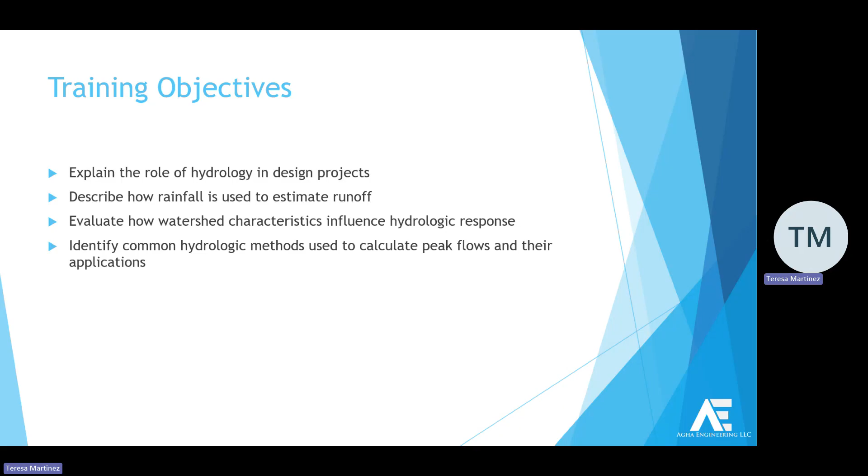So session one. Before we go through everything, since we all have some background in hydrology, we're gonna go through all the terms really quick, so that way if you know it, it's good, and if it's really old, it's good to refresh all the terms. So that's about session one. Okay, so let's go.

Okay, so the role of hydrology, as we mentioned before, hydrology is the input for the subsequent analysis or design work. The goal of hydrology is to obtain or determine the runoff based on your precipitation. We will use that as input to size our structure, the culvert, the ditch system, because everything's designed to provide the adequate capacity to pass a certain amount of flow.

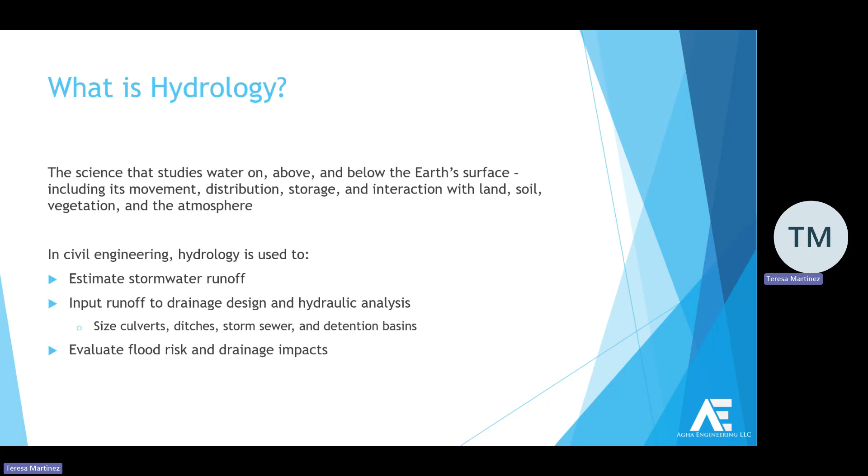So that's the goal. And then at the end, after everything's completed, the analysis, the design work, then we'll have to also evaluate if there's any impact to the existing condition, or if there's any impact to adjacent properties. So that could also lead to any legal issues as well.

So Teresa, you want to cover this one? Yeah, so we started it like from the basics. This is like going back to almost elementary school, but it is the essence of hydrology. Because when we think about it, we're thinking about the precipitation that's falling, but not all precipitation becomes runoff. So in our models, we account for total precipitation that falls, but we also account for losses. Water is lost through evaporation, infiltration, percolation, and those effects reduce the amount of runoff that we account for in our designs.

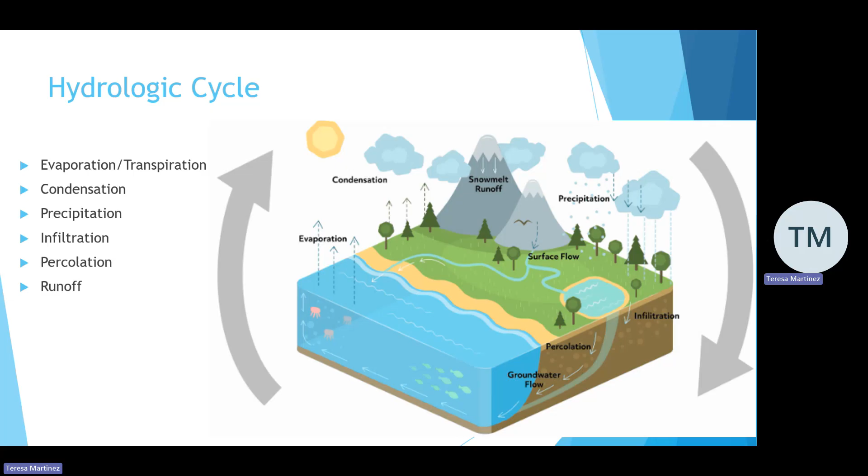So then when we translate hydrology into roadway design, when we think about roadway projects, what we're doing is either improving them by widening or adding more asphalt. And whenever we do those things, we're increasing the amount of impervious cover.

Meaning that now more rain that falls, or less of the rain that falls, will infiltrate. So you can see in the picture there's more water that's not going to infiltrate, and we have to figure out a way to quantify that volume of water to be able to design our systems.

The key goals in our hydrologic analysis are to be able to identify an optimal outfall. When we think about a drainage system, it's typically at cross culvert locations, maybe into a major stream. But when we think of, like you guys mentioned, a crossing analysis, typically you would set your outlet as that crossing location where you have a larger watershed coming in through there. So it's like two different perspectives.

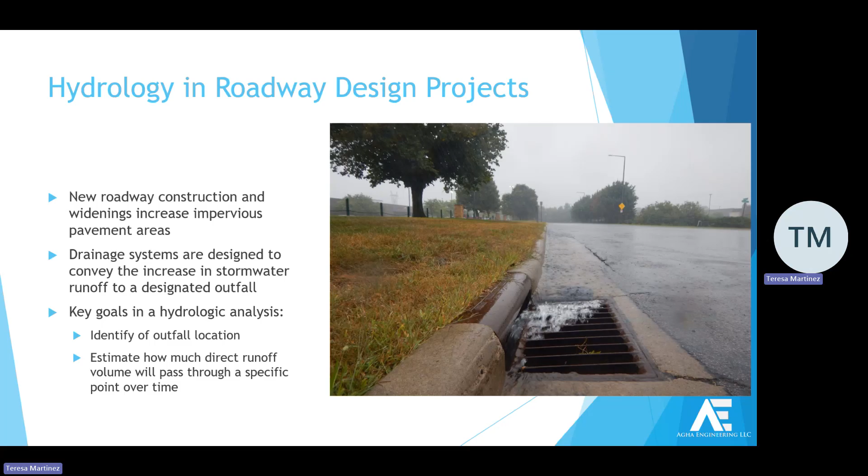Okay, so this is just common terminology that you may have seen in reports or heard mentioned. You have AEP, which is your annual exceedance probability, the percent chance that a storm of a specific magnitude will occur in a single year. So you'll hear people say 10%, 4%, 2%, 1%.

But AEP can also be used interchangeably with ARI, your annual recurrence interval, which is more of a statistical time description of the time between two rainfall events. And then we also have our design storm. So when you think about design, they usually tell you to use a specific annual exceedance probability, so they'll tell you a 10-year design, depending on the type of structure you're designing.

So yeah, for the percentage, right, so when they say 1%, I know it's said as annual exceedance probability, but the way I'd put it, for a typical guy, right, so I want to use layman's language, how is that?

Just like layman's term, right? Not language, term. At 1%, I mean, like I don't have a PhD. So it's like, it can be 1% of any given year, right? I mean, 1%, but you could repeat it back to back. Here's 365 days, so 1% of that, is it like a 1% chance every day it'll happen?

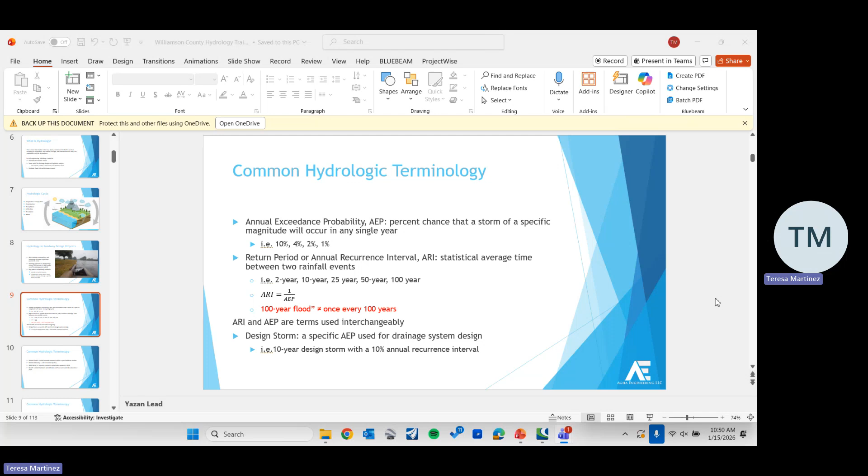Yeah, so I really like working here, they're constantly putting us through trainings. It's more environmental science or environmental engineering, yeah. So hydrology, some soil science, and a lot of pollution work, which doesn't get used much. I was like, well, I could go into oil and gas or civil, and I was like, I'd like to live with myself.

So yeah, like water and wastewater treatment, learned about it. But we don't really handle that, we have our environmental division that does septic, but other than that we don't really handle utilities like that.

Yeah, they set us up a tour because we had some summer interns, and we took a tour of the Round Rock wastewater treatment plant for them, so that was fun. It's really great working here because there's so many field trips and trainings, and we went to go see, what was it, I should know.

It's a lime plant, down south somewhere, right? New Braunfels. We went to go see like literally where they mine and do everything with lime. It was really, really bright there, everything's just coated in lime everywhere. So you're dehydrated and it's hot. I learned I never want to do mining, terrible.

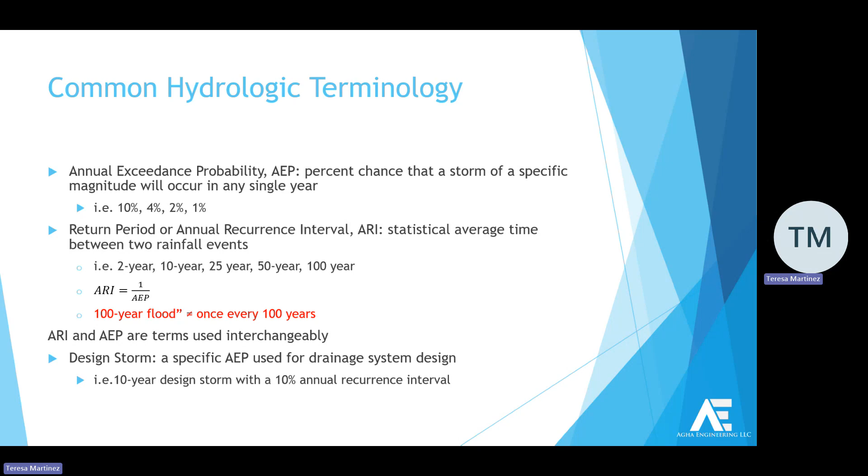But yeah, anyway, okay, do we wait for Con or okay? I think he's gonna come back later. Okay, we can keep going then. I think he said that, right?

You said that, yeah. So here we have rainfall depth, which basically tells you the rainfall depth at a specific time for a specific storm event. And then we have our rainfall intensity, which tells us how much rain fell throughout a period of time.

And then here we just have a general term, the NOAA Atlas 14. These are the new rainfall data updates that were released and implemented in 2018. Typically this is where we would get our rainfall data sources, although whenever you're working on projects, you should always look at your local jurisdictions because they have their own rainfall data that they want you to use.

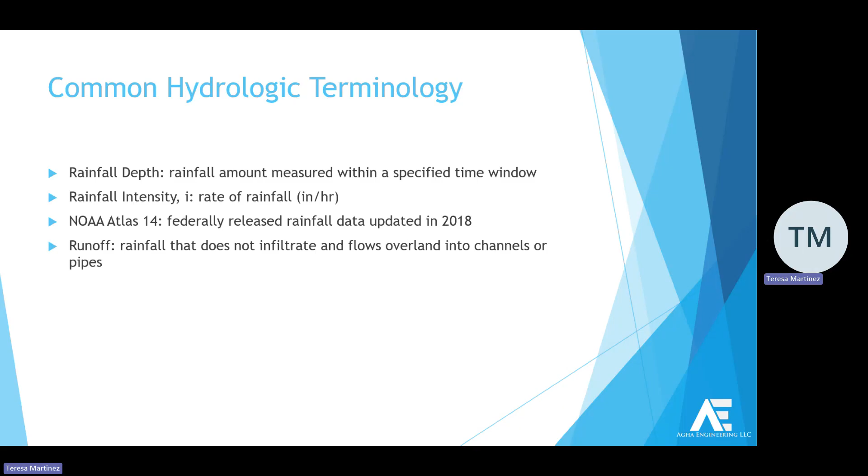And then we have runoff, just a general term. It's basically any rain that did not infiltrate, that we didn't lose, that we have to account for that's going to flow into our drainage systems or into our streams and channels. Sometimes people call it direct runoff. Right.

And then we always hear about peak flow, calculate the peak flow, Q. It's basically the maximum runoff rate within a drainage area or within a watershed. So our units are CFS, and we're going to get more into it in further slides, kind of breaking that down, what that really means.

And then we have our runoff methods, and these are the methods that we use to calculate that peak flow. Depending on the runoff method, we can either calculate our single maximum peak flow, or we can calculate a flow time history - basically a history telling us how the flow changed throughout time for a watershed or for a drainage area.

Here we have watershed, and that's essentially a drainage area. When you think of a watershed, it's more of a bigger drainage area. But essentially watershed, drainage area, you can think of it as an equal term.

And then we have the rational method. The rational method is one of the runoff methods that we can use to calculate peak flows. What it does is it transforms the rainfall data that we obtain from these different sources, like Atlas 14 or from local jurisdiction data, to develop the peak flows. So those methods have their own formulas that incorporate that in to give us an estimate of direct runoff.

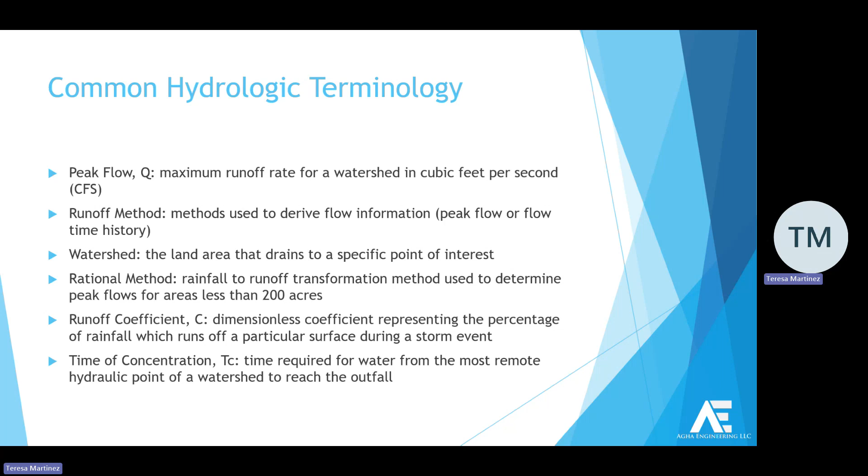And then we have the NRCS method here, which is another runoff method to calculate the peak flow. This is for areas greater than 200 acres but less than 2,000 acres. The NRCS method uses the curve number, which accounts for the soil type, the land use, and the soil moisture.

That's the part of the equation that helps determine true rainfall runoff. And then we have hydrographs, which are a time series of how flow changes over time for a specific drainage area and watershed. We're just generally introducing these terms that we'll talk about and break down in further slides.

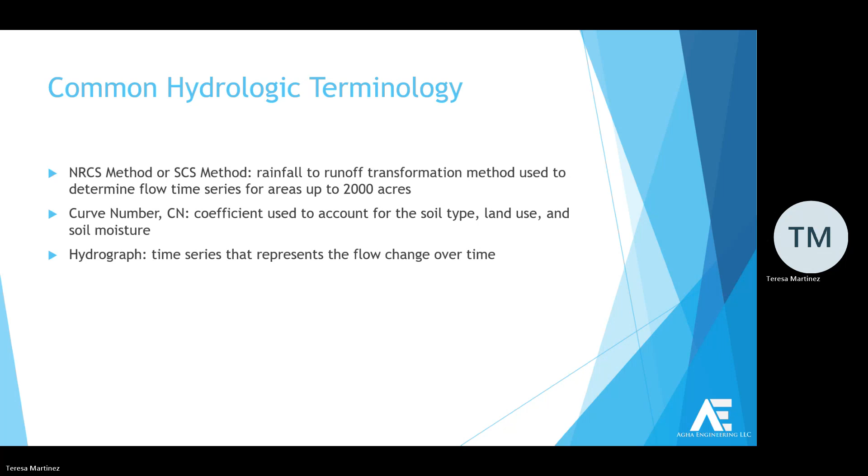Okay, so session 2, we're getting into the rainfall runoff transformation. So the entire process, we first need to identify our watershed. Once we define our watershed, we can start to derive all the hydrologic parameters associated with that particular watershed. That could be parameters related to the geometry of the watershed, like the shape, slope, cover, and other properties—all these will have to be quantified first.

Once we have everything prepared, we can look at, once we drop this amount of rainfall over the watershed, what approaches or methods we would utilize to convert this rainfall to runoff. And then the last thing we'll look at is the different characteristics of the watershed, and how that would affect the shape of your hydrograph, or the direct runoff hydrograph.

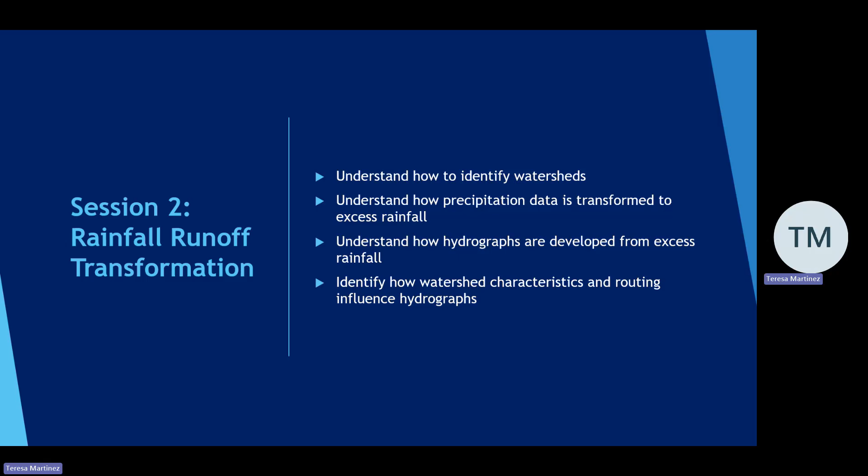So here we're looking at what a watershed is. I'm delineating what a watershed looks like. We identify those watersheds by looking at our high points and selecting an outfall. And the runoff within a watershed is going to act differently depending on the surface slope, the land use type, the soil type, the shape of it, and also the storage that's available in it.

When we think of surface slope, like hills, water is going to run off a lot faster—it's steeper, right? It's not like a flat area where water has to pond before it can finally move. With land use, depending on the type of surface, it could slow down or speed up water. With concrete, water runs off faster, versus grass, which is a rougher surface. Soil type—some soils can absorb more water than others, which also influences the amount of direct runoff you get.

The watershed shape matters too—that's more of a timing effect, depending on if it's a wide watershed or a linear watershed, it'll react differently. And also your storage effect, which just depends on the terrain of the watershed. I know in the engineering world it's not as simple as delineating a watershed like this, but that's just a general example. We have our high points around, and a valley or stream down the middle with an outlet here at the bottom.

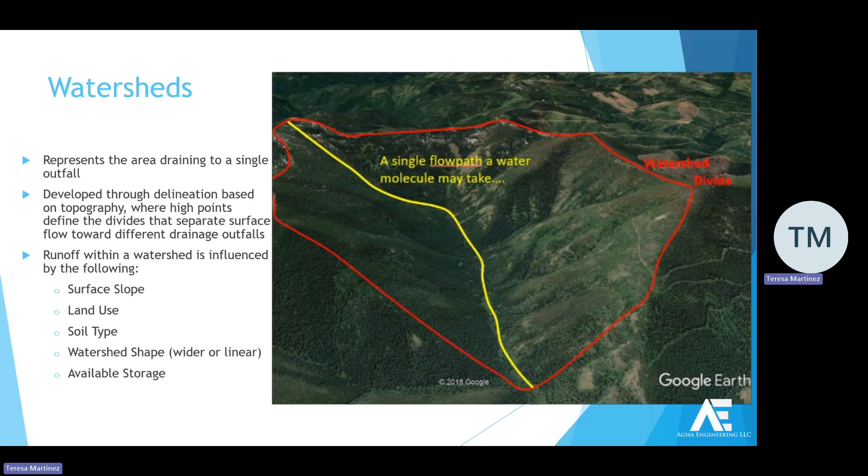Here's a general slide on recognizing contours. Whenever we see a circle like that, it's typically a high point. The way I like to think of it: looking at the elevations, if we were to drop water here at the top, where would the water drain towards? Water is going to go from a high point to a low point, so it's going to try to follow these ridges. Whenever you see these V points, this is a high point, and this is the downward slope of a hill or mountain, and water's going to flow this way.

On this side, we have an inverted contour. This is a high point here, and if I were to drop a water droplet here, my water's going to come down this way, down the middle. We'll see on the next slide a cross-sectional view that explains that a little better.

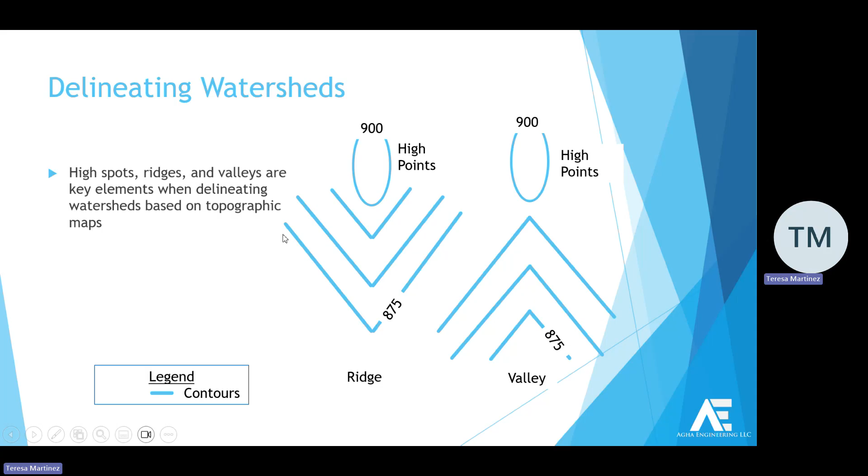Here we have both a ridge, which is the high point of the watershed, and valleys, which are the low points—the valley would technically be where your stream is. If we were to cut a cross section across this mountain, we know this red point is at the 850 elevation. Then it's going up, now at 875, so the terrain is going up. Then it comes back down to the 850 elevation contour, and then it comes back up and back down again.

When you compare the plan view to the cross-sectional view, you can really see that this is a ridge, here's another ridge, and here's the low point. If I were to drop water here—anytime you want to delineate, you always delineate perpendicular to the contours. I would come down this way if delineating a high point, and down this way if delineating a low point. Does that make sense?

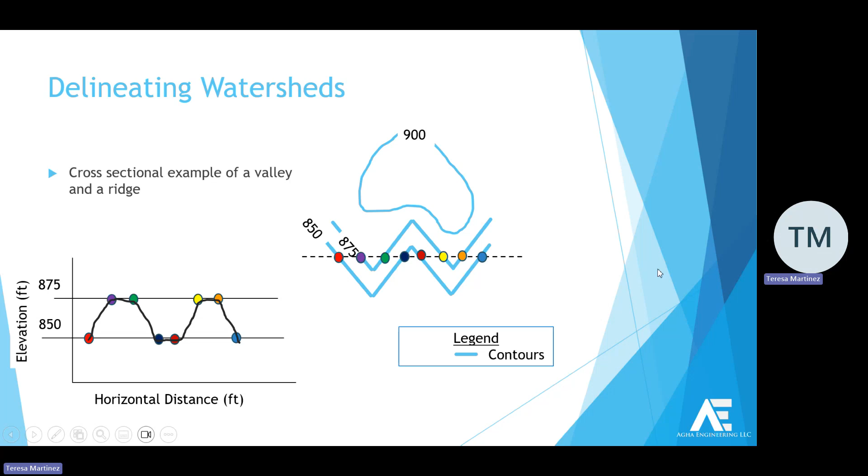Here's a general set of steps for delineating a watershed. First you identify your outlet—you want to know how much water is coming through at this point, so you identify your outlet. Here we can see two streams coming together. In the next step, you identify the high points, because you know the watershed is going to be bounded by those high points. Here, every X identifies our highest points on this topographic map.

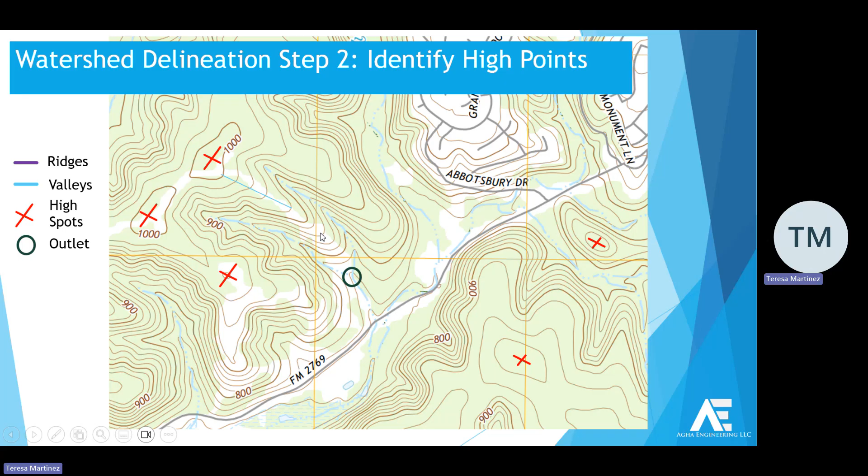And then next, you want to identify ridges and valleys. I can tell by looking at the contour lines and the intervals that water is going to come from this high point, come down this way. And then here, I'm between two high points, so water is going to go down this way, but it's also like a low point, a valley. So water is going to either go this way or this way here, but I still want to follow the general ridge point, so stay perpendicular to the contour.

Here I have another ridge. I can tell the water's coming down this way. And then here I can tell there's another high point, if I delineate along that.

And now for the low points, here I have that inverted V, we could call it, and those inverted V's are typically your valley points. So I know that if this is a high point, my water is going to go this way, this way, and this way. But my focus is this outlet point, so I only care about what's coming down this way. So I have one stream, aka one valley, and then I have another one here.

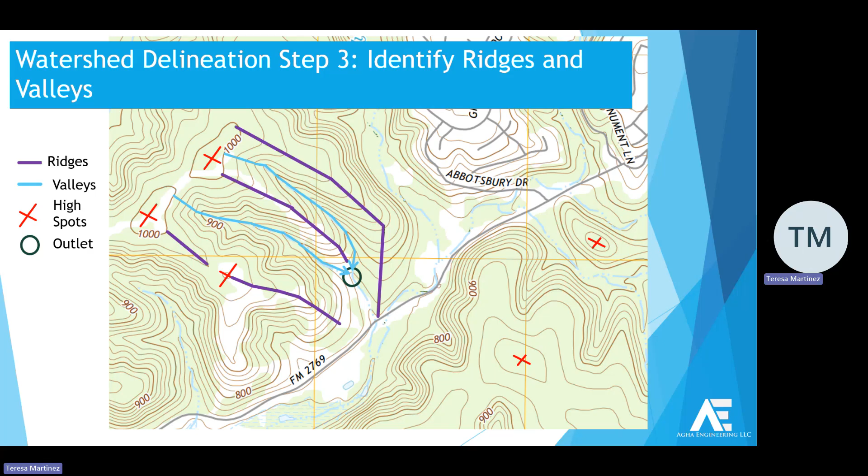And then in your last step, you tie everything together. So when you think of a watershed, you follow high points, right? And those ridges that we had drawn here were the high points where hypothetically water shouldn't come back - water from this watershed shouldn't go this way. So then we close it like a loop here, and now our valleys are the streams that will carry that water to the outfall.

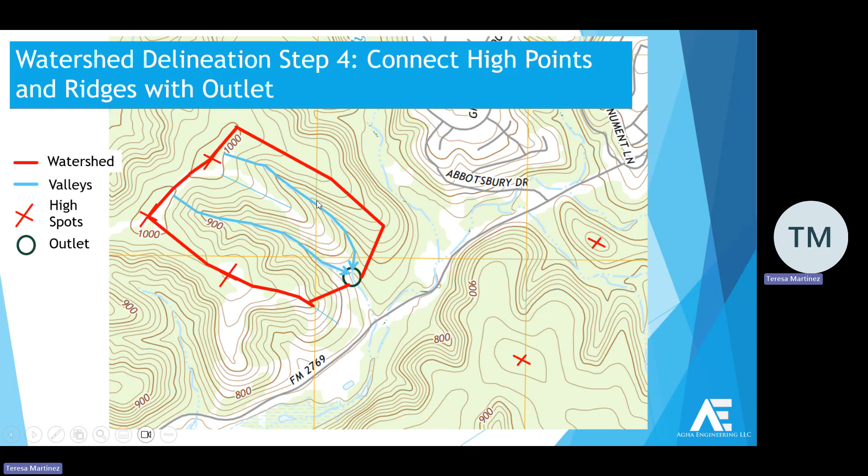And so here we just have a general example. So if we were to do this, our step one was to identify our outfall. So let's say that our outfall is this location, where these two streams converge. And then we have to identify our high spots.

So this one, if we look at it, the highest point within this one would be this high point, because this is like the isolated circle point, and from here you can tell that water's gonna come down this way. So you want to look for those isolated circles like these, because you know that that's the highest point where water's gonna come from.

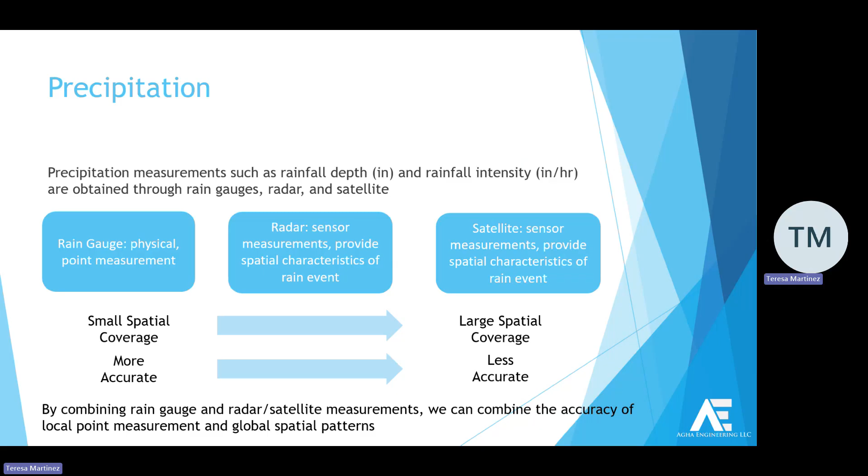So then we think about design storms versus actual storm events. Design storms are what we use to design our storm sewer systems - it's basically a hypothetical storm made to simplify things in our analysis. An actual storm event can vary. A design storm is simplified so we have a maximum intensity around a certain point, but in a real storm sometimes it rains really hard, sometimes it stops, and it fluctuates. For our hydraulic analysis purposes, we develop design storm events to better simplify that analysis.

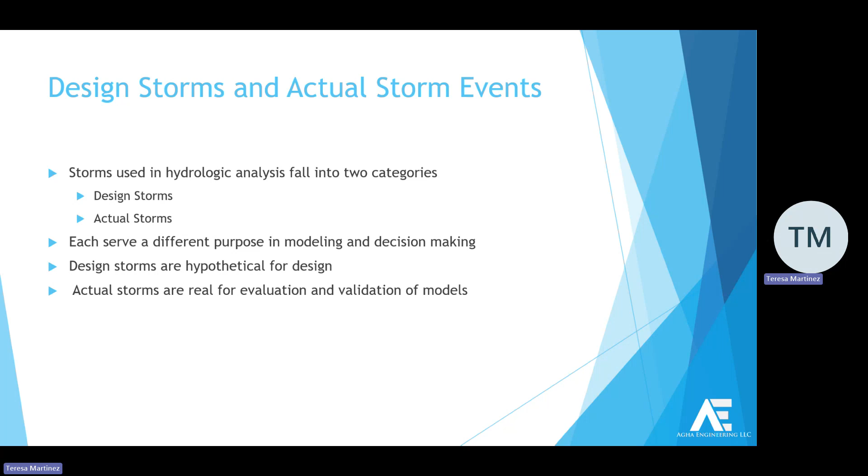In the design storm, the shape is defined by where the center of mass is placed - in this particular case, the center of mass is placed at 50%. Depending on your location, the design storm isn't randomly built, it's a product based on statistics. For a particular location, you look at all historical events of different sizes and durations. Engineers don't usually spend the effort to do this themselves - this information is already prepared by scientists or from a particular project done previously.

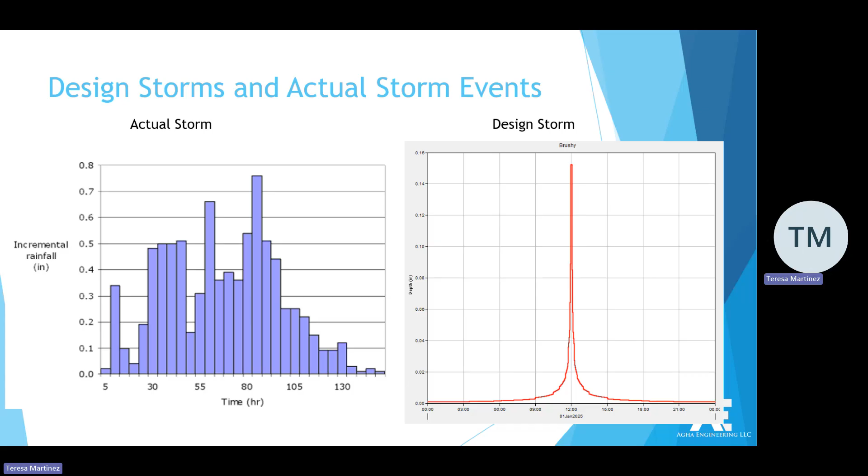To show that for an actual storm you can have multiple humps, whereas this is the actual result from like the HMS product, where it's actually a clean design one hump incremental rainfall graph. This is just a general graph to represent how intensity can change in an actual storm event, so they're not equivalent or related.

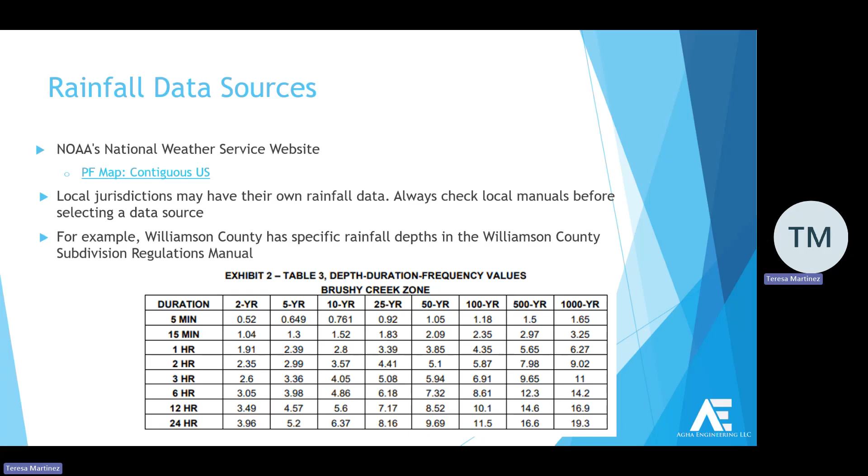This is a more simplified example, but we're basically going to develop a hyetograph that will show how the intensity represents the actual total rainfall that fell based on the changing intensity as the depth changes. We'll run through an example right now.

Okay, I was like, yeah, we'll run through an example. This part gets confusing to me. Yes, that's why we added a basic example, but there's still the general question of how HMS interpolates a result. So you were talking about type 1, type 2, type 3 — so that's related to this curve here.

Usually this type of curve is called an S curve. Type 1, type 2, and type 3 each have a different weighting, so I forget which one is which. I think type 2 is 50%, so your S will look symmetrical, and type 1's shape is a bit different, and type 3 is another shape. But the difference is where the mass of the rainfall is placed.

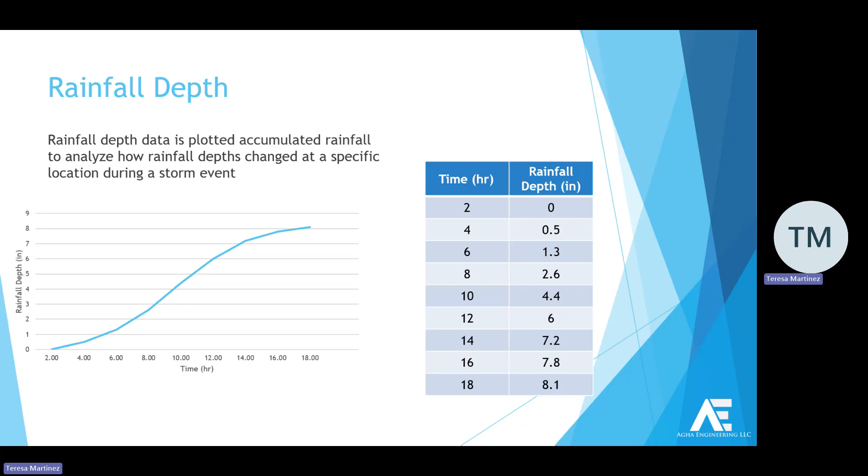Keep in mind that the goal from the rainfall depth data is to calculate the total rainfall that fell within a watershed. This rainfall depth only tells us its depth at a certain time, but that doesn't mean that if I added all that rainfall depth, that's the total rainfall that fell. That's just how the depth changed throughout time.

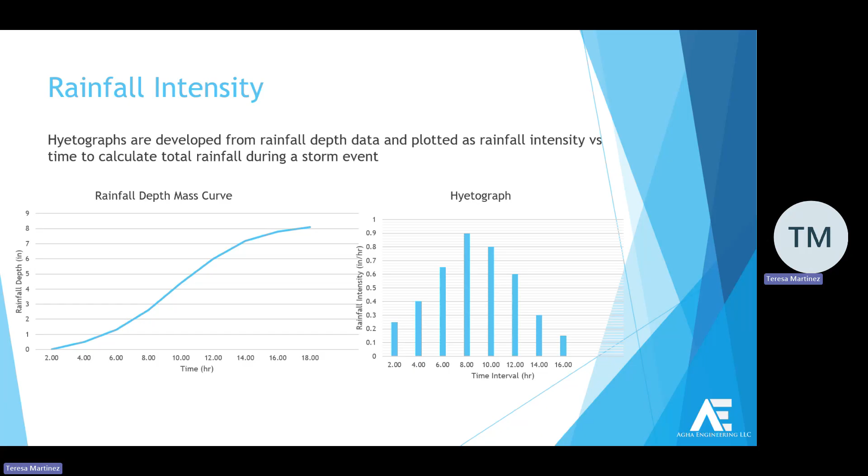The mass curve is your rainfall depth at a specific time. So at hour number 2, my rainfall depth was 0. But on my hyetograph, that time on the x-axis is actually the time interval — so at the second time interval, my rainfall intensity is 0.25, say. We're going to walk through transforming that mass curve into that hyetograph to get our total rainfall depth.

So this is the first step. This is the raw data we collect, say from a local gauge. It says that at hour number 2, our rainfall depth is 0, and at hour number 4, now I have half an inch. What we really care about is determining the incremental rainfall — how much more rain fell between time 2 and time 4. On the table on the right, we have our time interval, with even time intervals.

We're saying that at our first time interval, 0.5 inches fell, and we get that by subtracting the rainfall depth at time 4 minus the rainfall depth at time 2. Then we go on and develop how much more rain fell during each increment. You guys follow? For example, what would be my next incremental rainfall after the 1.8?

I guess what would come after? Here, 4.4 minus 2.6. I'm not amazing at mental math, honestly. No, me either. You're at 2.2? So which values are you subtracting? 6 and 4, 4.4 minus 2.6. Or did you take out the one on the wrong level? Yeah, so it'd be 4.4 minus... oh wait, 6 minus 4.4. Right, it's 1.6.

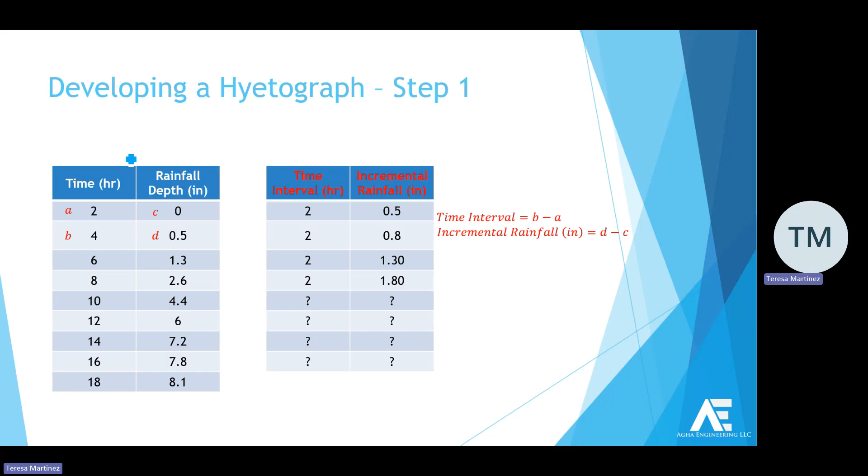We have the equation here — it's a little confusing, but you can go back and digest it better. In step 2, this is the full table developed from the last slide: our time interval versus incremental rainfall. This is still our rainfall depth data, just copied here because we still need it, alongside the fully developed time interval versus incremental rainfall table from the last slide.

Now that we know how much rain fell during our time interval of 2 hours, we can calculate our rainfall intensity, which tells us the rate at which rain fell during that interval. We divide the incremental rainfall by the time interval — so 0.5 divided by 2 — and that's how we develop our rainfall intensity at each time interval. Does that make sense?

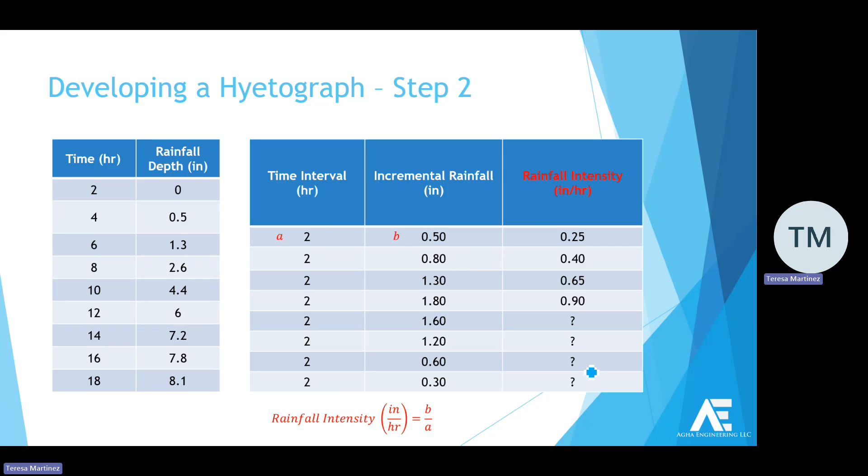Now we can actually develop or draw our hyetograph. We went from our time interval and incremental rainfall to get our rainfall intensity. This is the plot of the hyetograph. On the x-axis we have the time interval, and on the y-axis we have the rainfall intensity. You can see how this almost looks like a design storm - it's perfect, there's one hump. So this is like an ideal simplified situation.

But now what we really care about is our total rainfall, because remember the goal is to estimate our Q - we need to know our total rainfall to then subtract rainfall that we lose. So in this step, we're still trying to get the total rain that fell within our watershed.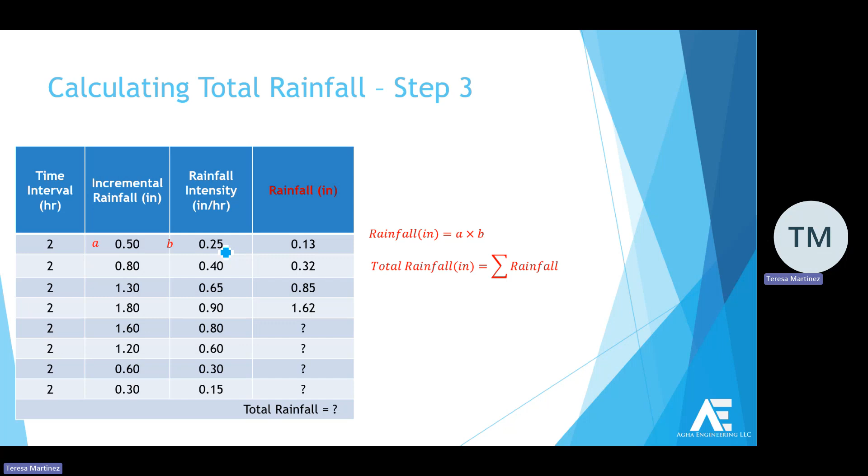To get the actual rainfall that fell, we multiply our intensity times our duration. This A shifted, right? Yeah, I think it got shifted. I'll explain it with this one better.

So the area, think about it - the rainfall under the area under the hyetograph represents the total rain that fell during that watershed. If we wanted to get the amount of rain that fell during this second interval, we could multiply the interval times the rainfall intensity. Because at that point, you're multiplying inches per hour times hour, so hours cancel and you're left with inches, which is the rainfall depth that fell during this 2-hour interval.

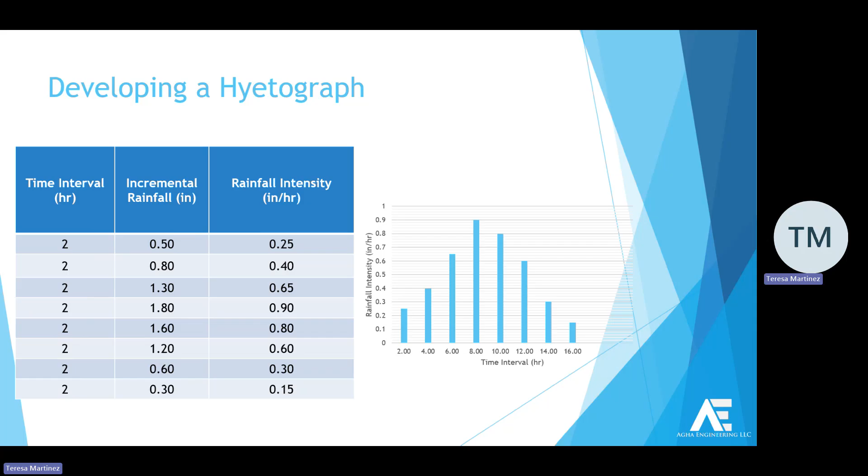That makes sense, and then we would do the same thing here for this interval. So 2 times my 0.4 is going to tell me how much rain fell during this interval, and I have this here - this one here shows that. So I have that 2 times this rainfall intensity would give me the rainfall that fell during this time interval, and so this is the area of this bar, and so on.

And if I were to add all this rain that fell during these time intervals, I would get my total rainfall. So from the storm depth data that I had, the true amount of rain that fell was 5.14 inches. But remember, not all of that rainfall turns into runoff - this is kind of just the first step to really determine our starting point of how much rain fell in the area. Does that make sense?

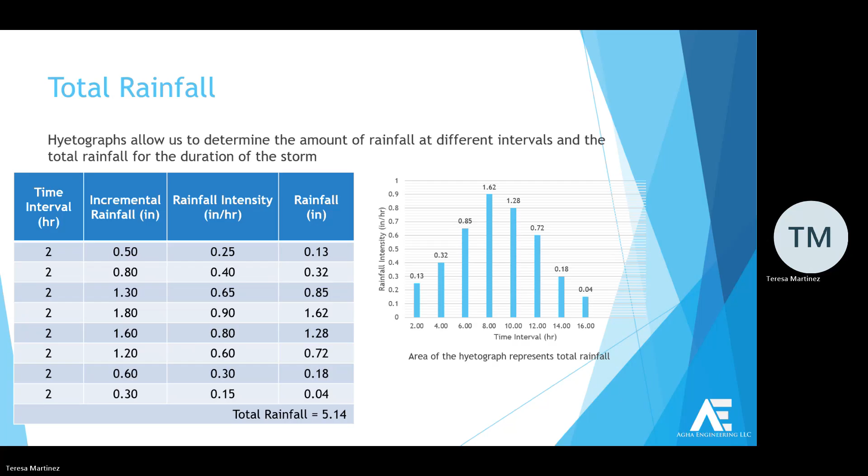And so that's a very simplified version - HMS can generate it for you. I know in school we kind of go through the calculations of it, but we do have software that helps us work more efficiently.

So here we use - I believe this was the 10-year rainfall data from the Williamson subdivision regulation manual - and this is like the mass curve that it generates for you. HMS takes care of the interpolation, because you see here how it only gives you the depth at 5 minutes, 15 minutes, 1 hour, 2 hours, 3 hours. But we care about, let's say we're looking at a 24-hour storm event, we need to know what happened in between. So HMS takes care of that interpolation instead of us having to do it manually.

I have a quick question for everyone. So when you look at the S curve, how would you relate the curve - because the curve is an accumulated curve, right? So you're looking at the slope of the curve, you could tell how the rainfall, the hyetograph, the incremental - how the rainfall is distributed, or in what portion of the storm you would expect the heaviest rain. In the middle of the storm, because that's when it starts kicking up.

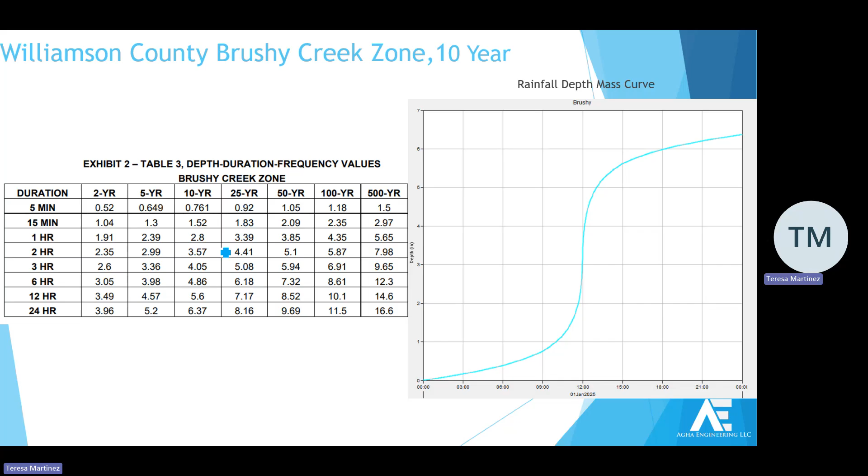Okay, right? And we can see that here, how that steep slope is at hour 12. And then over here also hour 12 is kind of when we have the peak for our maximum incremental depth.

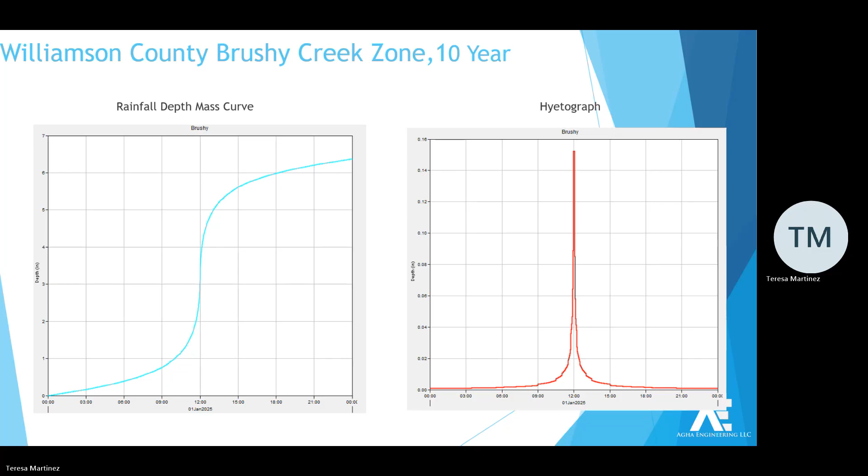When we think about a watershed, what truly happens in a watershed, we have to think about water balance. So now that we have our precipitation, we have to also consider our rainfall losses. Not all that precipitation will turn into runoff. So then our next step is to determine those rainfall losses, and there are different methods developed to account for that.

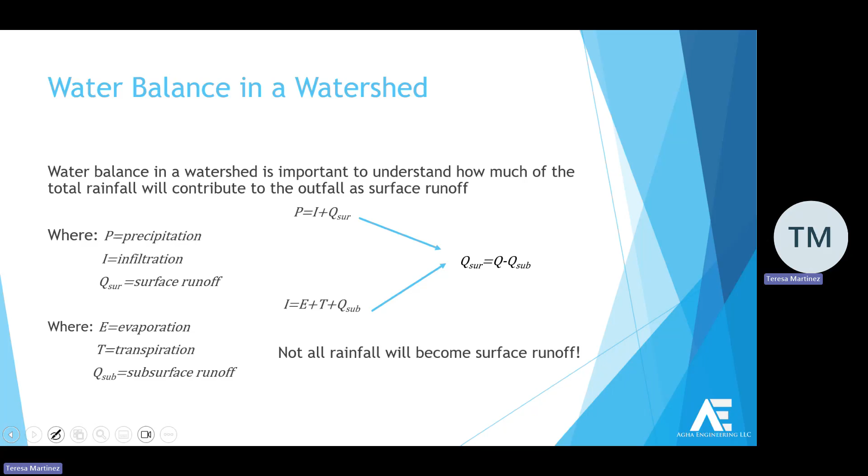The most common methods we see, but aren't the only ones, are the Green-Ampt method and the SCS Curve Number method. When we think of rainfall losses, there are multiple ways rainfall can be lost, like through infiltration and evaporation, but the main one we focus on is infiltration. Each method has its own way of estimating that rainfall loss, so from the total rainfall depth we just calculated, we would subtract a calculated rainfall loss.

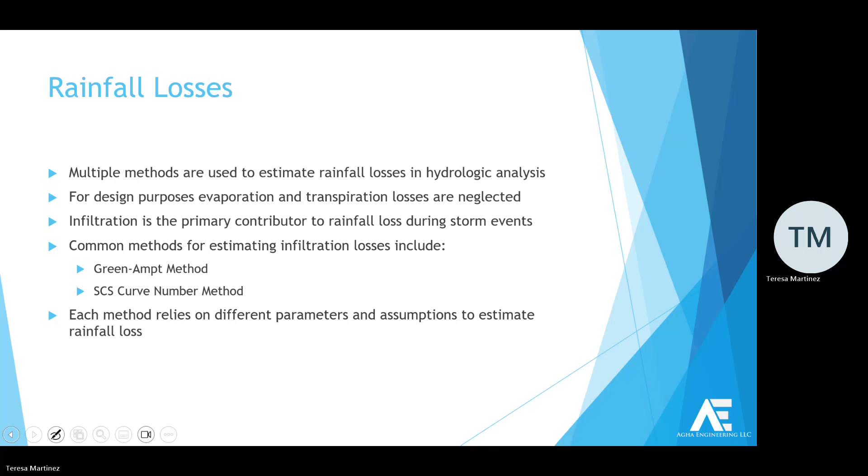Our first method here is the Green and Ampt method. It's based on the soil type's initial moisture content, its saturated moisture content, its suction head, and its hydraulic conductivity.

The TxDOT manual does have these values listed. The only thing you have to do is determine the soil type that you have, and you can obtain that information from the USDA soil website. It's a pretty neat website - we can go in and draw your own area of interest, and it'll give you soil characteristics within that area. Based off that information, you could go to the TxDOT manual, for example, and see the specific coefficients that you should use for that type of soil.

So they even have the initial moisture content - I know this is all modeling, but if you'd had a long drought, obviously the soil would have less moisture content, so how do they estimate that, I guess? Maybe that's too in depth.

That's a good question. So all these parameters that you have to input for the Green and Ampt method are determined based on experiments. They'll have, let's say, this type of soil, and then they would pour water over it, so then they can quantify all these values.

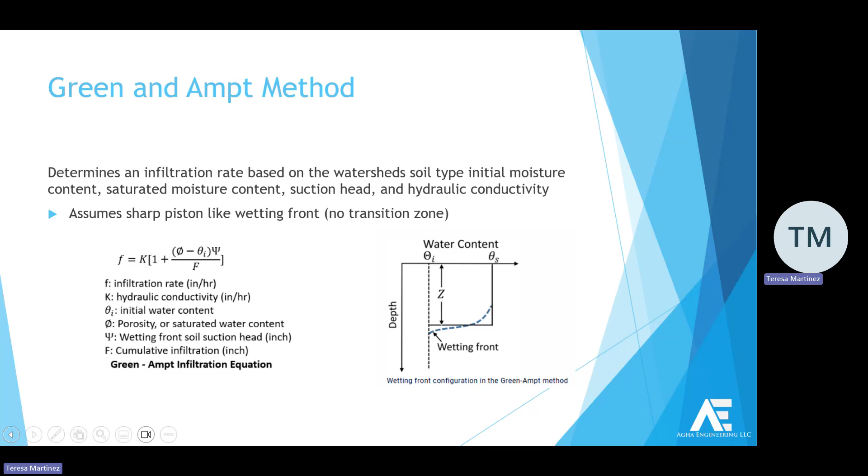So should we? That's what I was thinking - it's already 12. Wow, it is, I thought it was like 10. For lunchtime, yeah, so we can resume maybe around 1:05. Did you guys want to do lunch together or separate, or maybe you have other plans? We don't have any plans here, so it's up to you guys. I was gonna run an errand, I need to. Then I guess we can do separately. Sure, yeah.